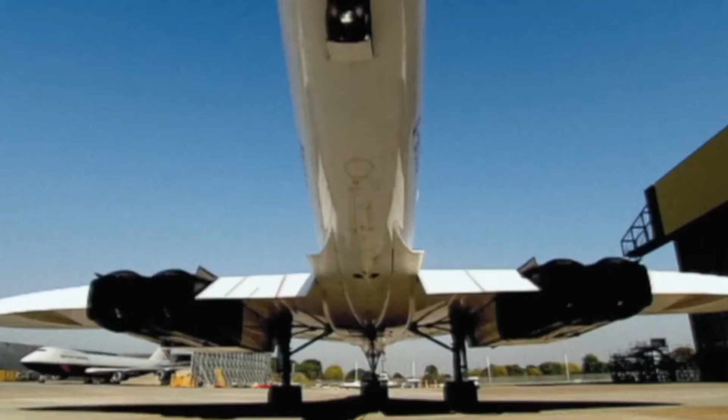For the first time in more than 30 years in its history, a Concorde crashed, leading to its discontinuation in 2003. But is it possible that a new Concorde can be created, one that meets the standards of commercial flying? Today, we're going to find out. Will we ever create a new Concorde?

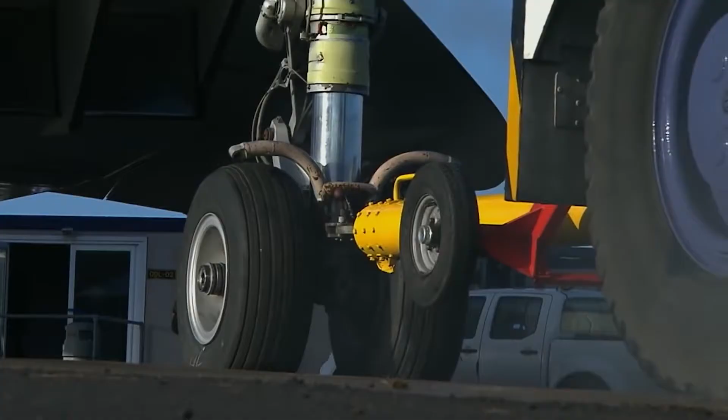Reviving supersonic travel: Mike Bannister piloted the final commercial flight of the Concorde in 2003. He flew over London on what would become his last flight on the Concorde and delivered it to a Bristol museum. 'And that's the time when it really hit me, and that's the time when there was actually, literally, a tear in the eye.' Bannister said it was perfect.

People have always wanted to travel fast, hence supersonic travel being such a lucrative option. But after the accident in 2000, combined with low sales and customer interest, it had to be discontinued in 2003. But now, we could very well be seeing the revival of supersonic travel and a new Concorde that could be ready for commercial use.

This prospect is interesting considering what supersonic travel can offer: a cruising altitude of 65,000 feet, twice the height of other airliners, and a speed of 1,345.6 miles per hour, much faster than the speed of sound. The Concorde flew higher, faster, and way cooler than most modern jets. You could make the trip from New York to London in 3 hours. That's how fast this thing was.

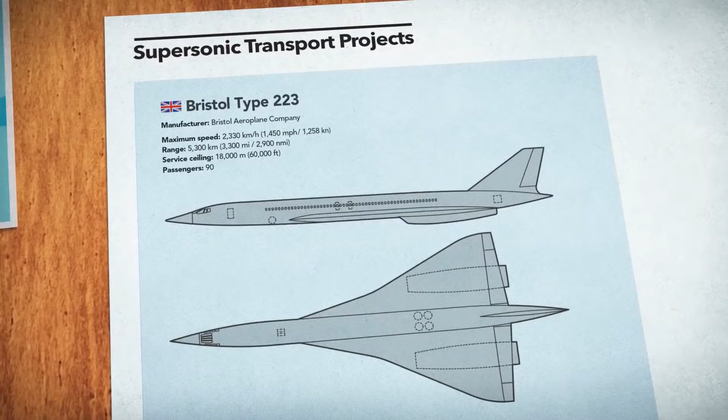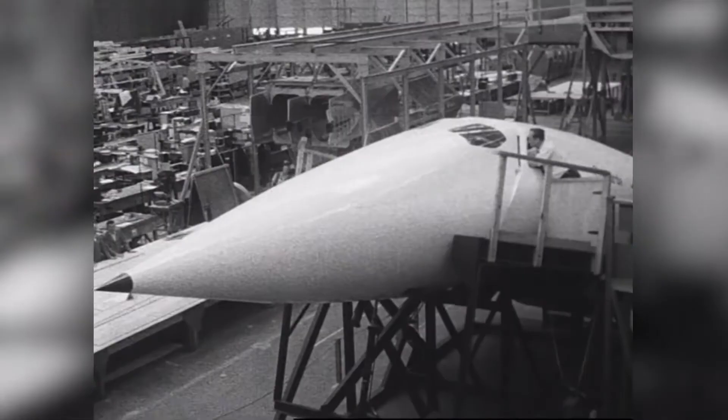This was possible due to British and French airlines competing with each other for the best supersonic travel. If there was the space race, this was the supersonic race. Soviet forces tried to compete by releasing the Tupolev Tu-144, but it was short-lived. It was propaganda-based with no commercial value whatsoever, quickly shooting itself down in the mud.

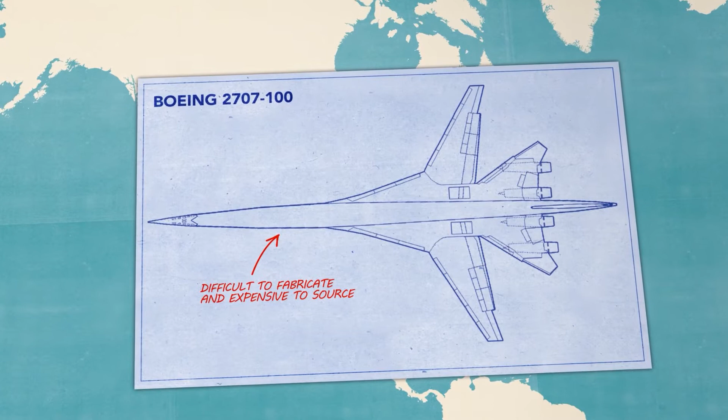The Boeing 2707 was the USA's attempt at supersonic travel, designed to fly over 300 people at an insane speed of 2,300 miles per hour. One of the greatest concepts in modern flight sadly remained only a concept. They didn't have the technology, nor the investors for such a project, which left the Concorde to reign supreme for over 27 years before its demise in 2003.

But right now, in 2020, supersonic travel could be back in the works. The possibility of flying faster is something people will always be interested in. Let's be real, nobody wants to fly in a plane for more than 6 hours, let alone flights that take over 10 to 16 hours.

First class or economy, flying at such long intervals is draining, not just for passengers but also pilots and cabin crew. With supersonic travel, you can reach your destinations in just a fraction of the time a normal commercial flight can offer. As of now, there are two major parties looking to revive supersonic travel. Could they create the new Concorde?

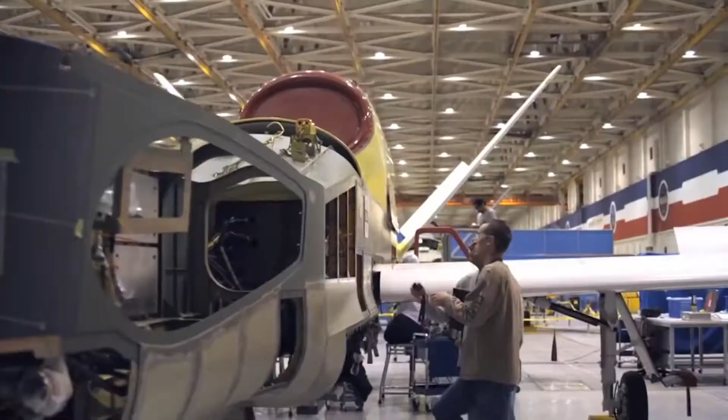Aerion AS2. Aerion is one of the companies looking to make a splash in commercial travel, and they're looking to bring back supersonic flight as an option. Tom Vice, President, Chairman, and CEO of Aerion Corporation, said: 'Concorde was a brilliant piece of machinery, a noble experiment, but it put too much emissions in the environment, too much noise into our communities, and was too expensive to operate. What we're trying to do is very different, and with this, we have the AS2.'

The Concorde was a noble experiment, but unsustainable. It was an amazing aircraft, but also full of deficiencies. It was too thirsty, too short on range, and it was too noisy.

In the end, it was too expensive to operate. Only 14 aircraft were ever delivered to airlines.

Aerion is developing a 12-passenger supersonic jet named the AS2. What they hope to accomplish is greatly ambitious. They want this jet to travel at more than 1,000 miles per hour, which will essentially shave off 3 hours from flights from JFK to Singapore and JFK to Sydney.

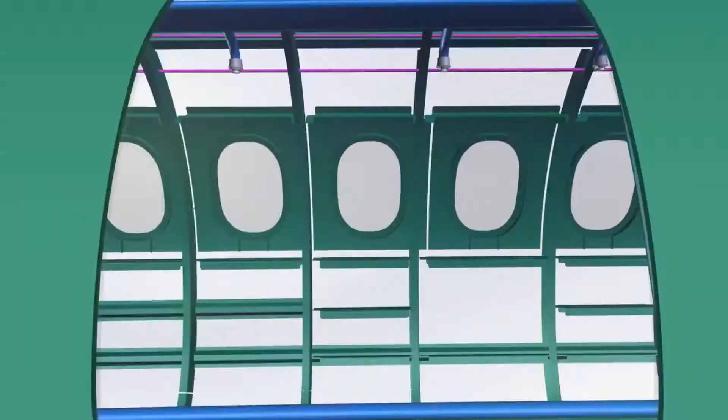FlexJet is already on board as a launch customer as well as leasing company for an order of 20 aircraft. The first flight is projected for 2024, and they hope commercial use is ready by 2026. It will come at a steep price for the company, as the AS2 currently comes at a price tag of $120 million. Not exactly cheap, but hopefully worth it.

They also plan to use the lowest fuel burn possible, correlating with their plans to be more carbon friendly. It's still in the planning stages at the moment, but it's definitely something we should watch out for.

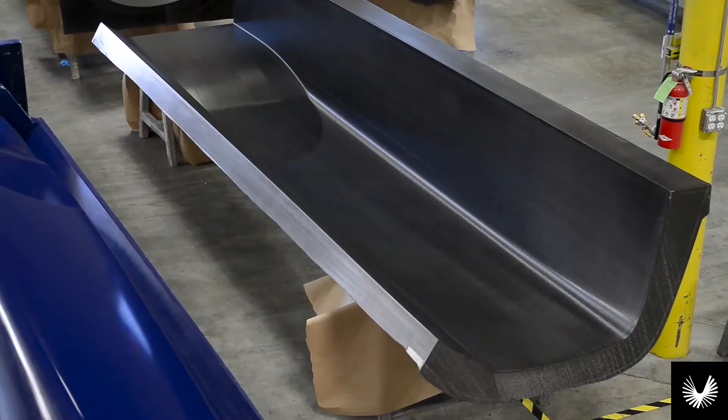Boom Supersonic XB1. On the other side of the world, Boom Supersonic is rolling out its XB1 supersonic test plane. The XB1 is a small-scale model that showcases the new technology and its capabilities in terms of supersonic travel. The world is a much different place than it was in 2003, so they argue that the experience of supersonic flight needs to be different as well. There are definitely ways to make it better, and it's worth exploring every possible avenue.

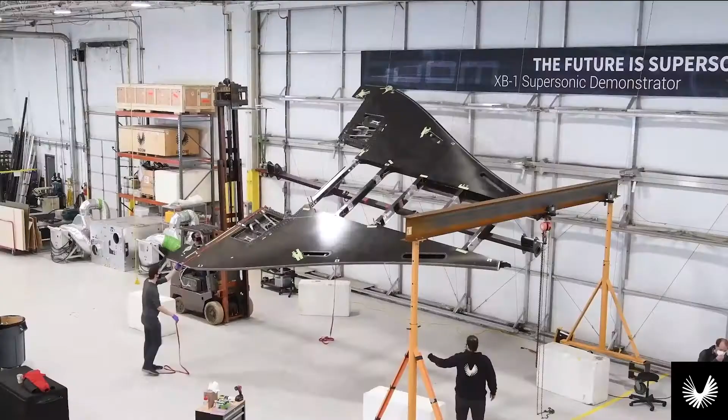The final model, which will be the flagship model, is called the Overture. Its goal is similar to the AS2: it wants to be the fastest commercial aircraft in the world, but at the same time maintain a low environmental impact. The XB1 is already in its testing program as we speak, and the first flight should be around 2021.

Depending on the results of the test flight, we will know when the Overture, which they claim will be the fastest and most sustainable supersonic airliner, will be ready for testing. Their goal is to have the Overture ready for commercial use not later than the year 2030.

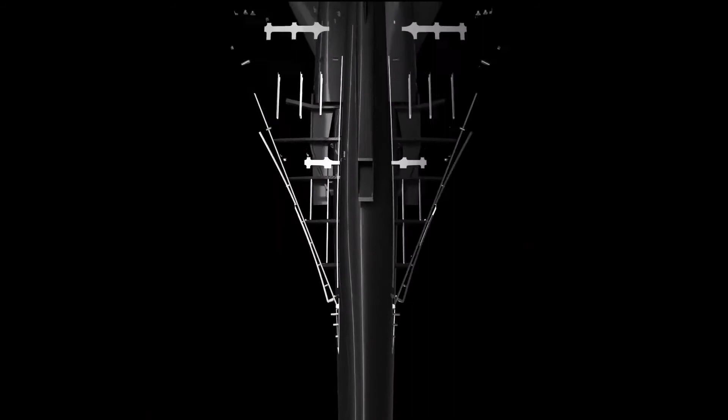Is it really needed? A question asked for any ambitious project at a large scale. We have to consider the effects of COVID-19 and the pandemic that has affected the world. The travel industry probably suffered the biggest blow of the year 2020. They're even saying that business travel will not return to its previous level.

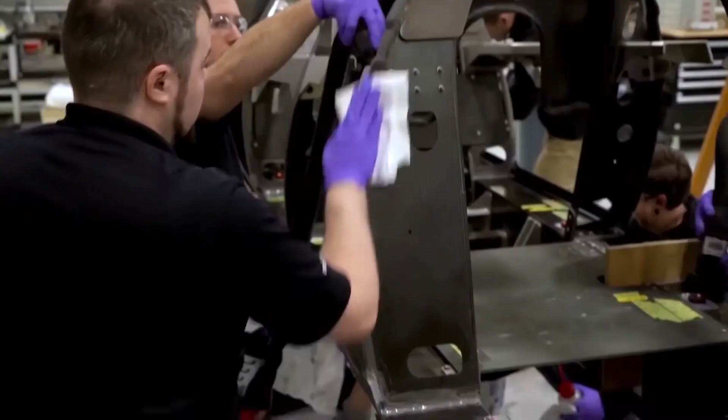But this won't stop Aerion and Boom Supersonic from pursuing this project. While it may take time for things to go back to normal, air travel is something that connects us as human beings. Being able to experience different cultures around the world and meet new people is an essential part of the human experience. And if 2020 has taught us anything, it's the way we should hold on to our humanity, because it may be all we have left when it is all said and done.

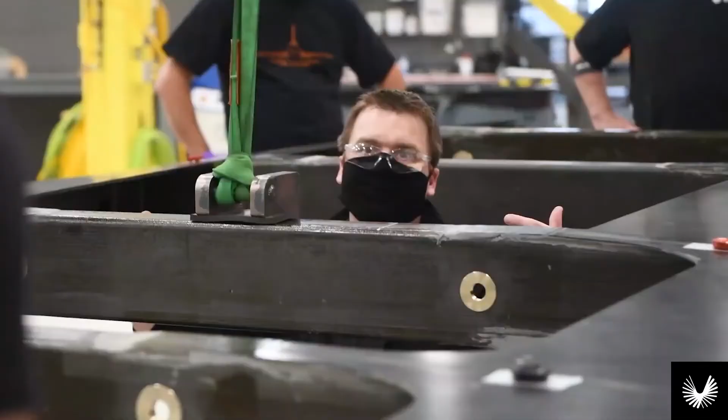For air travel, if an option for faster travel is available, then it should definitely be explored. There are still many things to consider, such as the environment as well as the economy, and most importantly, safety. We don't want a repeat of Concorde's incident to happen, so these companies should do everything in their power to assure that we are not sacrificing the safety of everyone inside the plane while getting to our destinations faster. But as we slowly transition back to normal, supersonic travel is something that will eventually be back in our lives, and we either embrace it or deny it.

What do you think of supersonic flight? Will you be riding in these new Concordes? Drop a comment below letting us know what you think and how you feel.